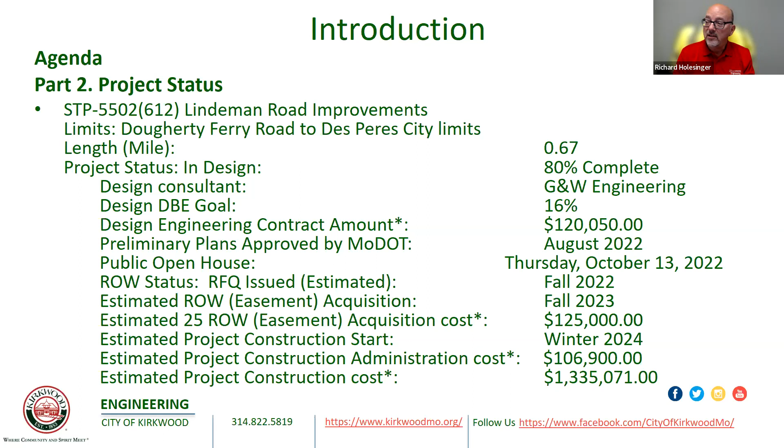Right of way acquisition will be commenced after that, in the fall of this year and probably the fall of next year. I expect about 25 easement acquisitions to be performed. The estimated project construction start time is around the winter of 2024, with completion probably the middle of 2025. There's also the projected construction cost of about $1.3 million.

The asterisks I had on the other page mean those items or elements were eligible to receive 80% of funding. Our funding limit for this project is $1.3 million that has been granted through East-West Gateway and the Missouri Department of Transportation.

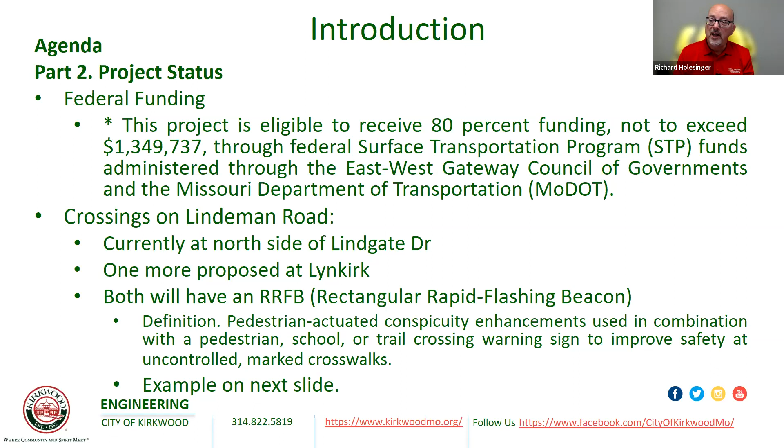Currently, pedestrian crossings that we're looking at on Lindeman Road—there's currently one at the side of Lindgate Drive, and there's one more that was proposed for Lynkirk, but we're still deciding on those two choices. They will both have an RRFB, which is a pedestrian-actuated signal for these uncontrolled mid-block crosswalks. I'll show you an example of it on this slide here. This is kind of what it looks like.

These are generic examples of what they're going to look like. The manufacturer could have a little bit different configuration on them, but that's what an RRFB is or will look like.

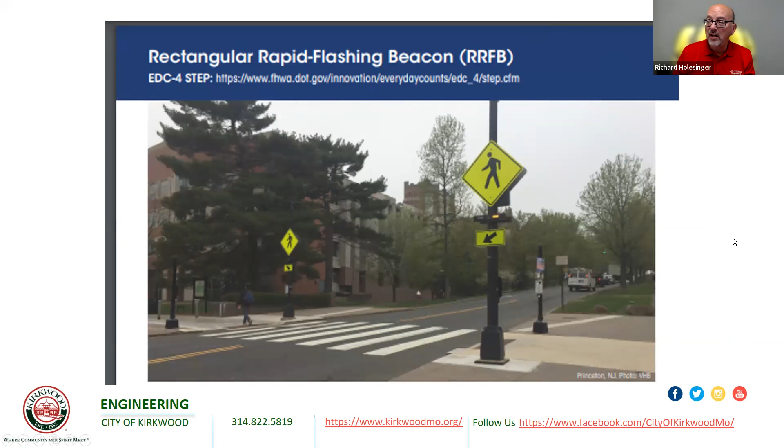Like I said, we'll conclude the virtual meeting by about 7 p.m. tonight. Tomorrow there'll be an open house at the Kirkwood Community Center, room 201, from 4 to 7. Comments—we are allowing about a 30-day period to receive them. We'd like to receive them no later than Friday, November 11th.

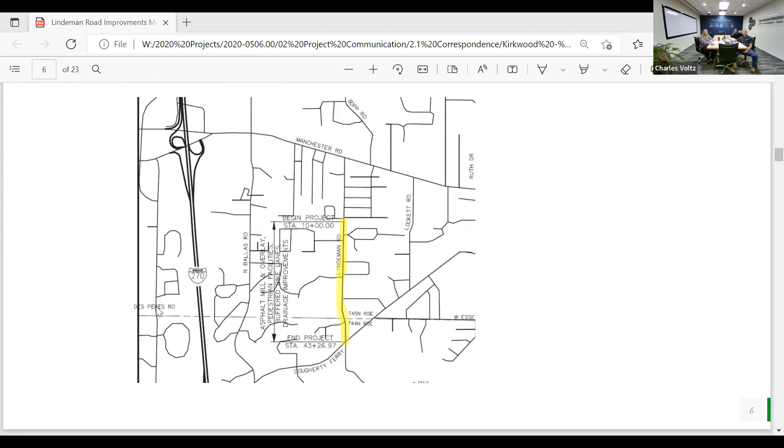So this is just a pictorial view of the project. Again, from the border all the way through to Dougherty Ferry is the length of this project, 0.67 miles. So the existing conditions, as we sit here today, there are 2 travel lanes.

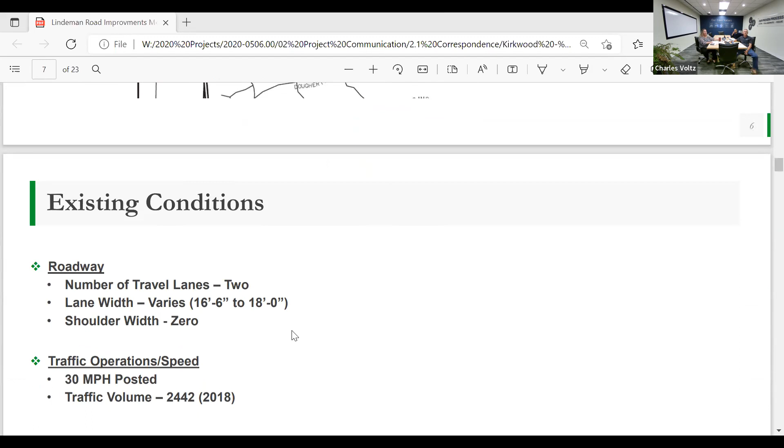The lane width varies between 16 feet 6 inches to 18 feet. There is no shoulder width. 30 miles per hour is the posted speed limit. The traffic volume in 2018 was recorded at 2,442. You'll see that the forecast all the way to 2030-something, you'll see it in another slide, is basically the same. We're not expecting the traffic volume to increase nor decrease over the next 10, 15 years.

Pedestrian bicycle facilities, there's some existing sidewalks on both sides as it sits today. The crosswalks do have a lack of visibility, and as we all know, there's no bike lanes currently within Lindeman Road. It does have some traffic signals and stop signs. From a drainage perspective, both sides have some curb inlets and storm systems and ditches. And as we look at the landscaping, everything is grass and in good shape.

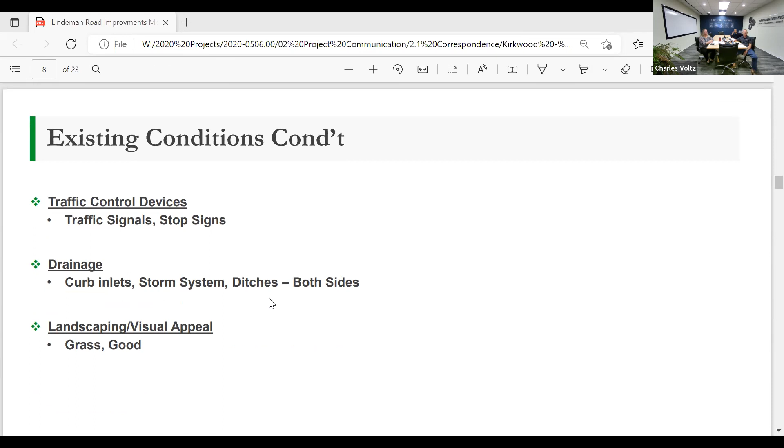So what are we going to do? Well, this is a typical section of where we sit today. I got ahead of myself by a slide. So again, from right of way to right of way is about 60 feet.

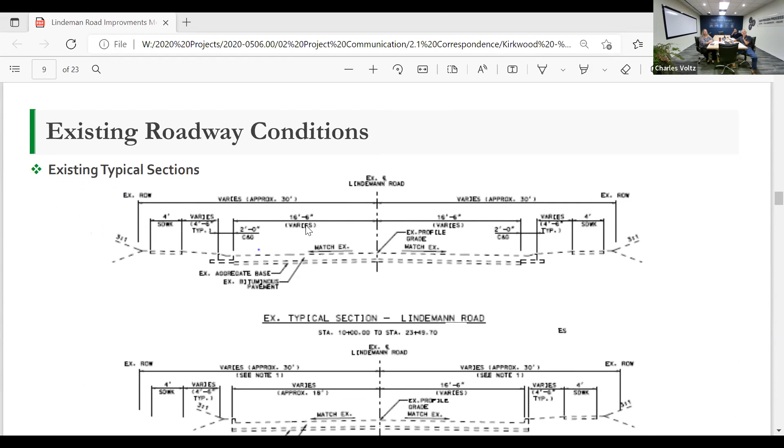So you can see that the lane width is 16 foot 6 and varies. It does have 4-foot sidewalks currently. There's no bike lanes, and that's basically where we sit today. I'll have another section further in this presentation talk about what we're proposing.

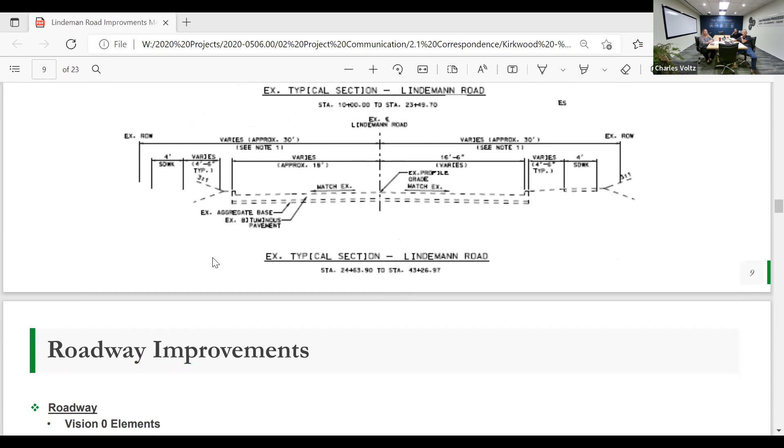As part of these improvements, from a roadway perspective, we're looking at Vision 0 elements. We're still looking at 2 travel lanes. The lane width will be reduced down to 10 feet. There will be no shoulder width will be 0. The design speed will be 35. The speed limit will be 30. Again, I mentioned the traffic volume didn't change from 2015.

We will be providing new traffic signals, new stop signs. We will also be incorporating curb bump outs, and those bump outs are going to enhance and reduce the vehicle speed, reduce the pedestrian crossing distance, and increase pedestrian visibility to drivers. So they'll be incorporated in the design.

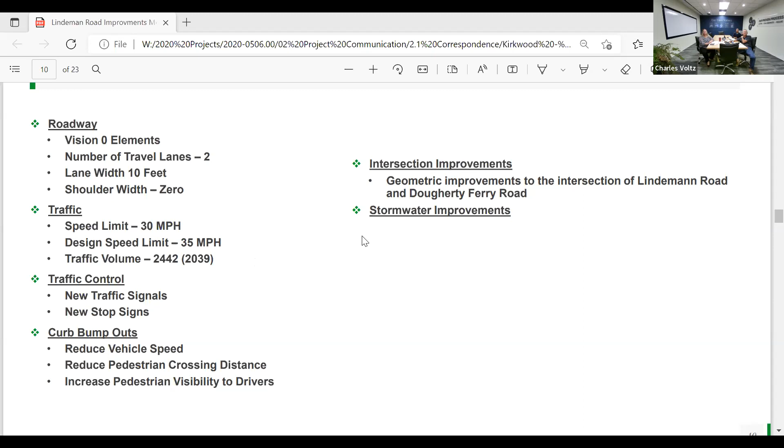And again, I mentioned the intersection improvements. We're going to revisit the intersection of Dougherty Ferry and Lindeman Road. And stormwater improvements will be, again, enhancing and incorporating the necessary runoff protection we currently have there today.

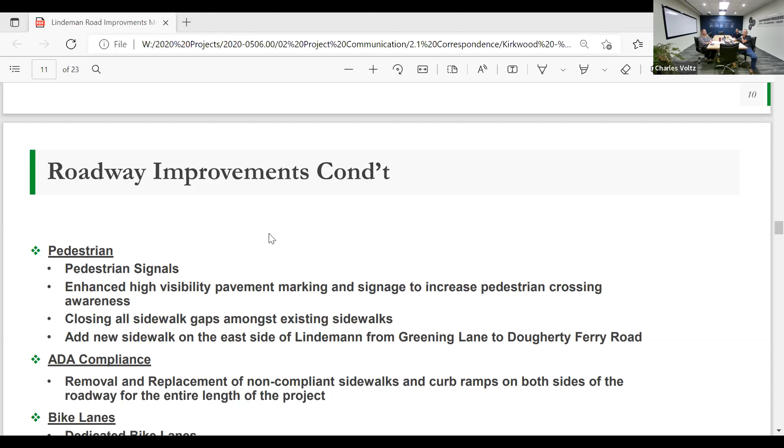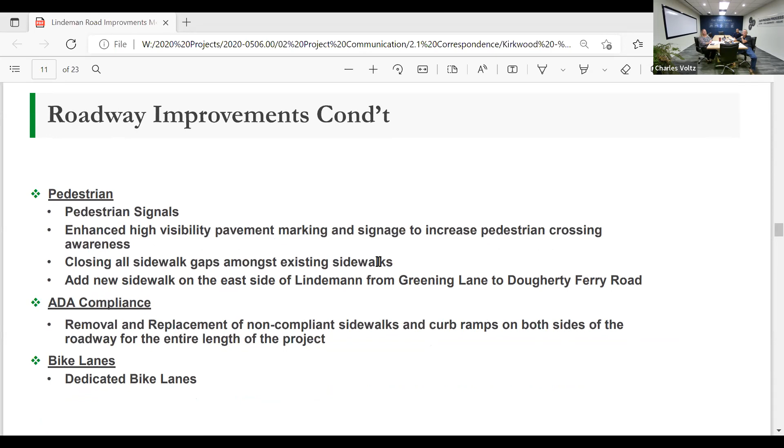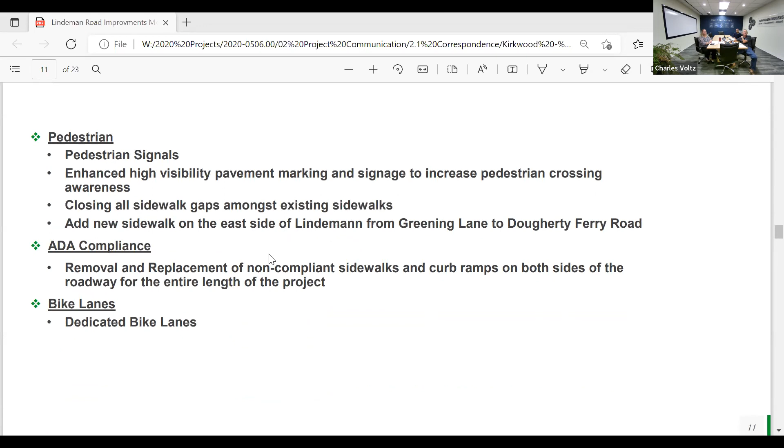On the pedestrian side, Richard mentioned some of the signals, so there'll be pedestrian signals. We're going to enhance the high visibility pavement markings and signage to increase pedestrian crossing awareness. We're going to close all the sidewalk gaps amongst existing sidewalks. We're looking at adding a new sidewalk on the east side of Lindeman from Greening Lane to Dougherty Ferry Road. We're going to be providing ADA compliance design, which includes removal and replacement of non-compliant sidewalks and curb ramps on both sides of the roadway, and put in dedicated bike lanes.

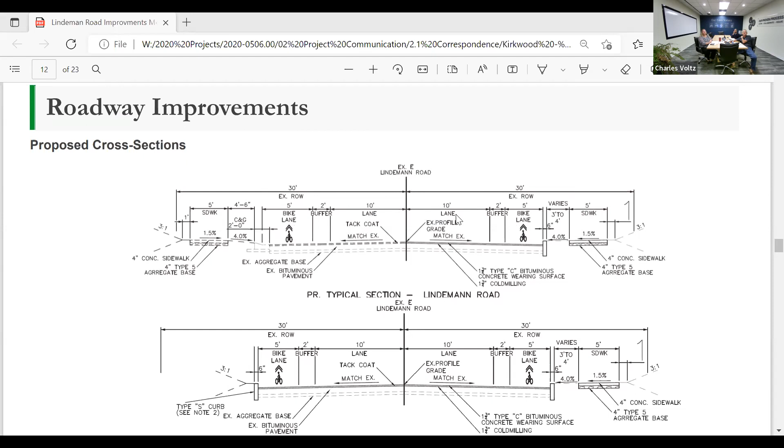So this is how it's going to look going forward. We have the 10-foot lanes, we have a 2-foot buffer on either side, we have the 5-foot bike lane. Then we have green space, and then we have our sidewalk where this is a right of way. Then we have our 5-foot sidewalk. So you can see that the right of way distance is still 60 foot as it stands today. Those are the changes that we're going to be looking at going forward as part of our design.

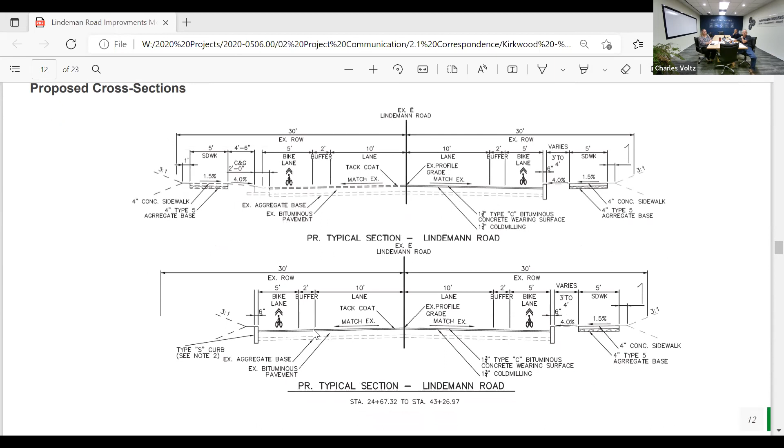So I included a couple of the plan sheets here. We have made up boards on these plan sheets that you're going to see. In fact, these sections here have also been made up as boards. So if you attend the meeting tomorrow or come through as part of the public forum, you'll see these on a 24 by 36 inch board, and you'll be able to see the improvements we're planning on incorporating onto Lindeman Road, and we'll be able to answer any questions you might have further at that time as well.

Again, these boards will be more visible to those in attendance tomorrow. They'll be on 24 by 36, so you'll be able to see a little more detail associated with that.

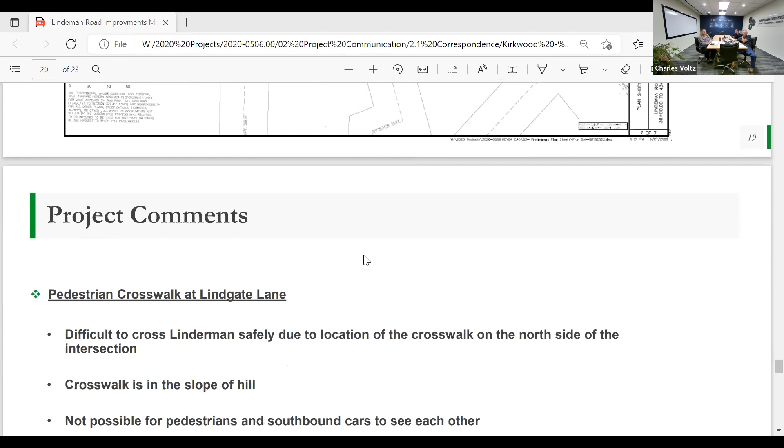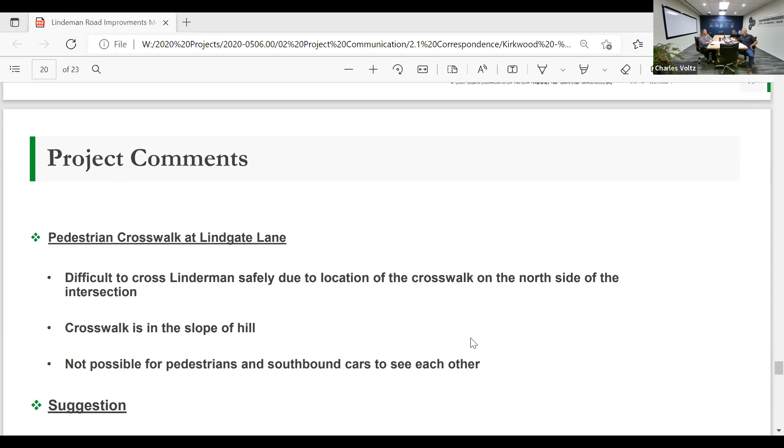So prior to today's virtual meeting, we did get an email from one of the residents, and the resident had this comment: it was difficult to cross Lindeman safely due to the location of the crosswalk on the north side of the intersection at Lindgate. The crosswalk is in the slope of the hill. It's not possible for pedestrians and southbound cars to see each other. And she suggested that the crosswalk be relocated to the south side of the Lindeman intersection, or add a crosswalk warning signal with solar power flashing lights.

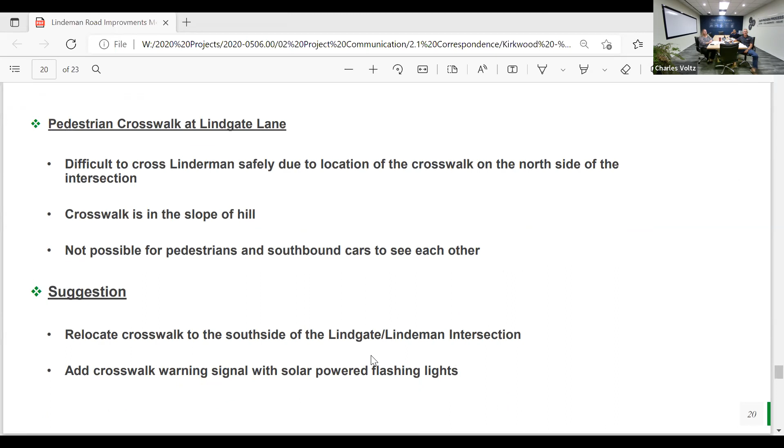Well, she must have seen the presentation before, because that's exactly what we're proposing here. Her second suggestion was adding a crosswalk warning signal with solar power flashing lights.

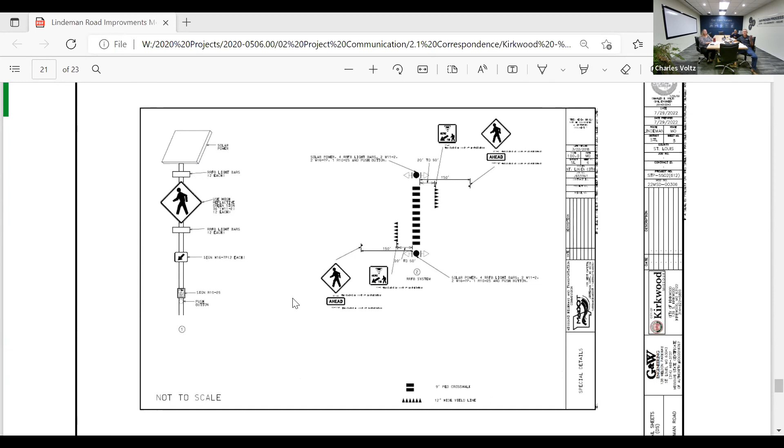Richard had shown that previously, but this is basically the detail that we are incorporating on our drawings at this point in time. It's a MoDOT standard detail, which shows the solar panel, the lights, the sign, and of course the crosswalk here and everything like that. So we appreciate that comment, and we look forward to other comments as well.

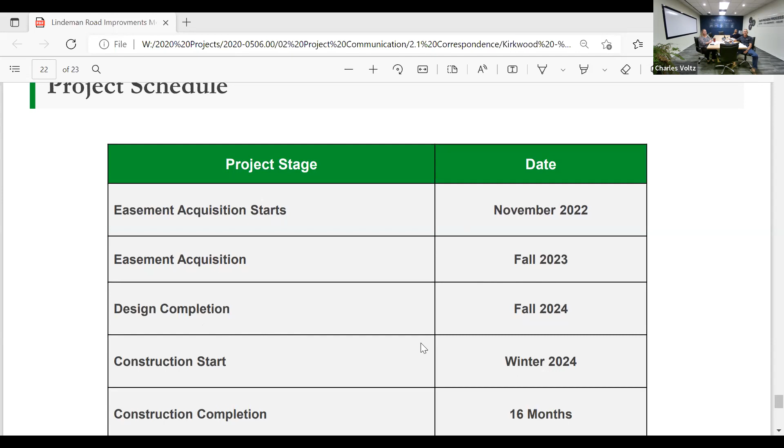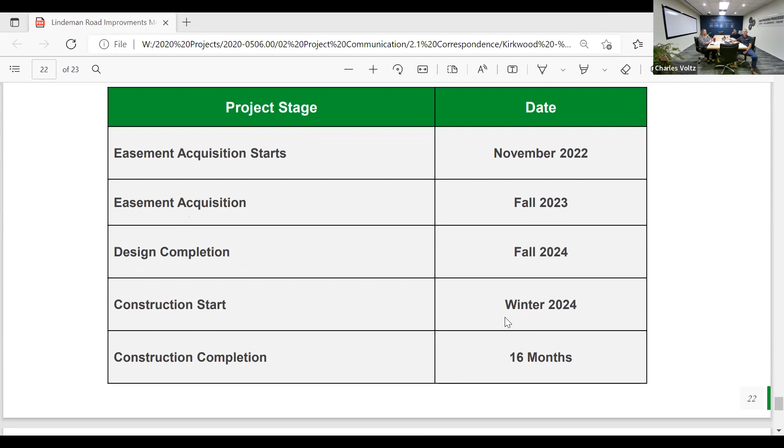So as Richard had mentioned, where we stand right now with the project, we're looking at starting the acquisition of the easements next month. We envision that we'll be complete with the acquisitions of the easements by the fall of '23. At that point in time, we would finalize our design and have that all completed by the fall of 2024. It'll then go out for bids with construction starting winter of 2024, and construction will be completed in 16 months, as we're proposing.

So that's the presentation. At this point in time, we'll open it up to questions.

Okay, I've got one raised hand. Let me give Michael Carmody a chance to talk first. Michael, you there? Yes, I'm here. Can you hear me?

Yes, I can. Great, first of all, great job. It really is an exciting move forward for Kirkwood. Kirkwood's a leader in things such as this. Having said that, I do have a couple of questions.

My first question is about the channelized lane at Dougherty Ferry and Lindeman, which would be on the east side of Lindeman. Is that going to continue to be a channelized right turn lane from Dougherty Ferry? Yes, right there. Yes.

With that, a simple ask - would you consider putting in a raised crosswalk in that channelized lane? We know that channelized lanes are extremely dangerous, and that would make it a much safer crossing in that channelized lane.

I think I understand the question. So basically those coming down Dougherty Ferry, making this turn onto Lindeman, and then your crosswalk is here.

You see that, Charles? Can I step in here? This is Chris with City of Kirkwood. Hi Mike, how's it going? Chris, how you doing? The line work that you see on there is actually a proposed raised crosswalk. Oh man, you're killing it. We're one step ahead of you. I love it, that's great news.

So, second question: further down, where the resident brought up about moving that and putting in the rapid flashing beacon, which you know, Chris, I love that - is there consideration there for a raised crosswalk there as well?

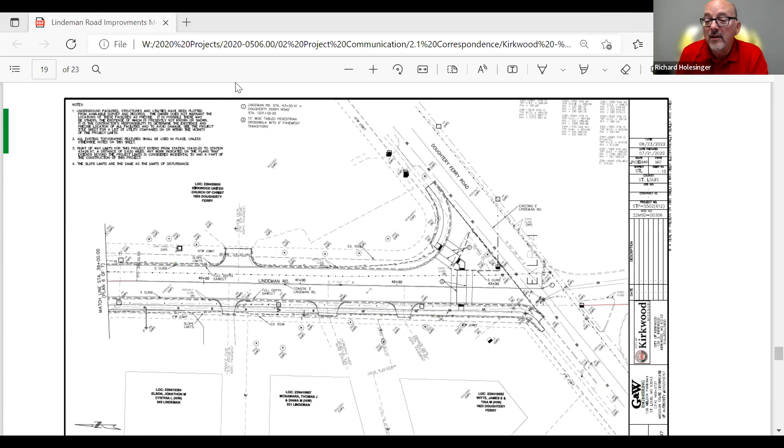So I'm looking at the east side of Lindeman, and I see where the existing road is, that there's a dotted line. Then there's a dotted line with, I guess that's 3 trees, I'm not exactly sure. So the 2 lanes in the middle are the 2 roads, one's the bike lane, and then is it the sidewalk? Because you said you're not taking down any trees, so those 3 trees will stay there, and you're just going to... I'm not exactly sure where things are going with your tiny pictures.

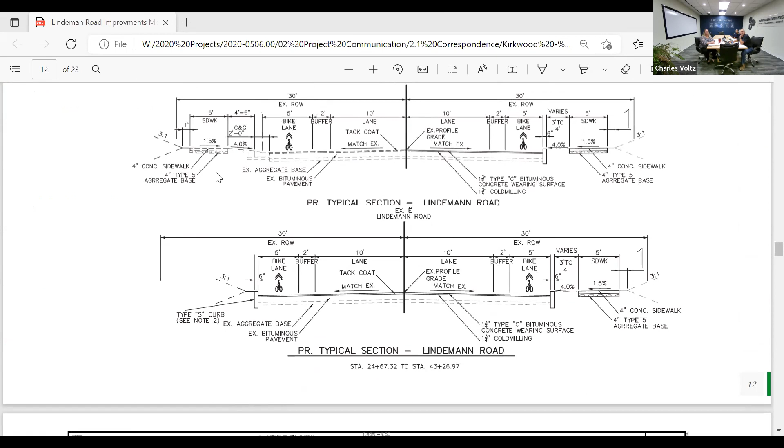Let me take you back to this drawing right here. So as you saw in the previous drawing, we have the 60-foot right of way. So we're staying within that existing right of way with the build out of the traffic lane, buffer, bike lane, space, green space, and then the sidewalk, a 5-foot sidewalk. This is, okay, so 10 feet.

Okay, so if you can go back to the other thing we were looking at, because you said you're not taking down any trees, but if I'm looking at this correctly, aren't those things that are... Those are outside the right of way. Actually, the right of way is closer to the road, and then there's an existing easement line on the outside of those trees. Oh, no, go on the other side of this? Yeah, the east side, this one.

Okay, so those trees are outside of the right of way. The right of way is the dash line between the trees and the road, and the dash line on the other side of the trees is an easement line. So this line is the easement line, the existing right of way is this arrow that points down to this dash line here.

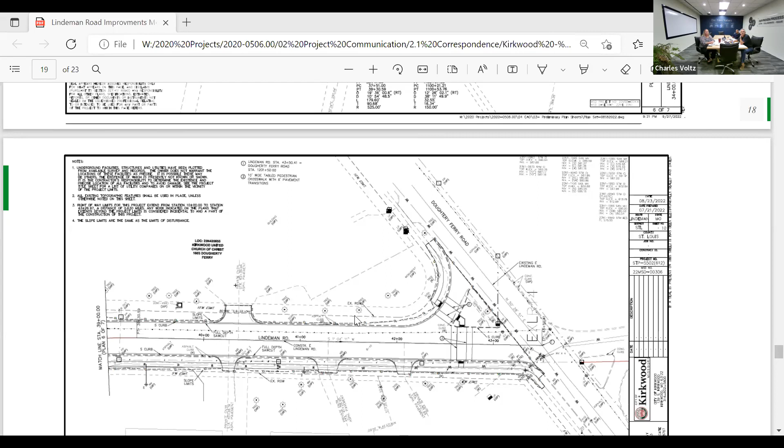And that's where the sidewalk will start? That will be the edge of the construction site, so these trees will stay. Okay, but when the construction is finished, the dotted line will be where the sidewalk is? There would be no sidewalk there. Oh, you're not putting a sidewalk on that part of Lindeman? Correct. Oh, okay, so where does the sidewalk stop?

At the intersection, it stops at the intersection. So if you go along Dougherty Ferry and you're going along that curve down and then across the street, you would make a crossing across Lindeman. And then if we go up a couple pages, that's when you could see where that sidewalk picks up. Okay, so you're not putting a sidewalk then between Lindkirk and Dougherty Ferry on the east side of Lindeman? Correct. Okay, thank you, that answers my question.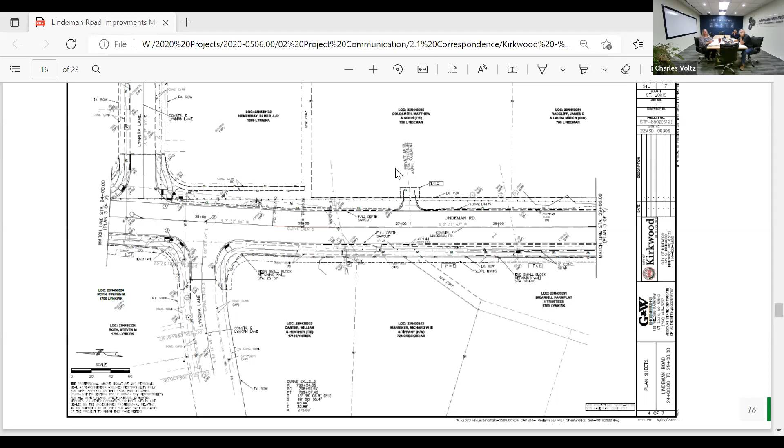Is a 60-foot right of way the width that is currently curb to curb, or are you acquiring an additional strip of land? I think we already answered that. That was from Laura Radcliff. Yes, I just couldn't see it, I wanted to make sure we weren't missing a question. Good catch.

Michael, do you still have any questions? I still see your hand up. Rick, I see a hand up from Patricia Parker. Has she already spoken? I'll ask again, Rich, I'm fine, Michael is fine. Thank you guys, I'm just gonna move along now, but thank you all for a great job. Most importantly, for the extra time and effort you guys are putting in tonight. I know it's not unusual, but I appreciate the service. Bye-bye, thank you Michael.

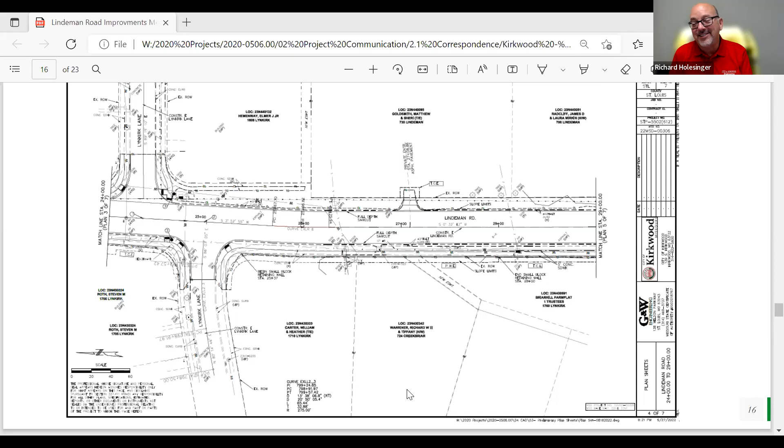I'm sorry, give me a chance here. Hello, it's Patricia, sorry. You're still out there, aren't you? I am. Okay, since nobody is jumping in to ask anything else, what are the plans for my part of

Lindeman? If it's federal money, somebody has to go after it. My part of Lindeman is the most dangerous part. We have no sidewalks whatsoever from Ballas Road to Dougherty Ferry. What are you planning to do with that? So your part of Lindeman is not a functionally classified street, so we cannot get federal dollars for that portion of Lindeman. Excuse me, it's not a functionally classified street?

Correct. So East-West Gateway determines what roads are eligible for federal funding. Local streets are not eligible for funding through federal dollars. And I'm not saying it's eligible for city local funds either. If you would like sidewalks, there's a petition that would need to be filled out because that involves other neighbors on your street. A petition would need to be filled out for the city to consider sidewalks on your portion of Lindeman. There are very few houses on my portion of Lindeman that face the road.

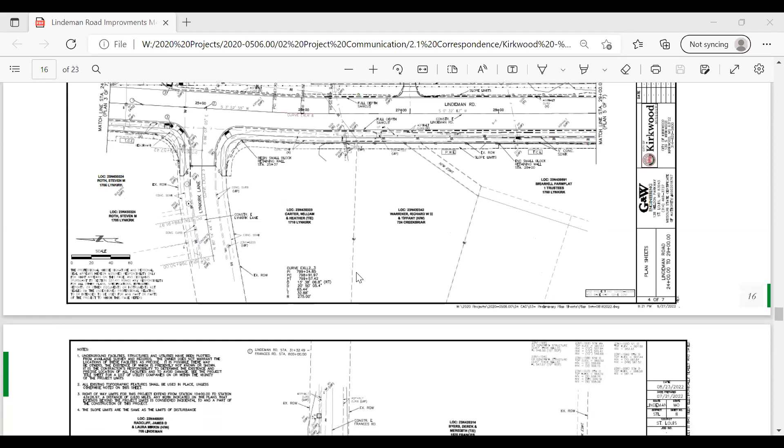There's maybe 1, 2, 3, up to 6 houses that face the road at all. So yeah, we would need a petition from the majority of those 6 houses to add a sidewalk. Because a lot of people have differing opinions of a sidewalk in front of their house. I get that, but I also have the opinion that when you're walking on that narrow street, really 2 cars, when you park a car out on Lindeman, people can't pass, it has to be one at a time. You cannot get 2 cars through there.

Understand, I'm passionate about this because I walk every day. Somebody's gonna get killed and it might be me. There was an old man who damn near clipped me the other day, he was so close. It's dangerous, I'm just passing that along. I appreciate that, and it's wonderful what you're doing to the other part, but where I live it's exceedingly dangerous. And I've had my say.

Thank you very much. What I'll respond to that, Patricia, is we've got a sidewalk project going on right now on a different street in Kirkwood. They don't have any sidewalks on that street right now, and there are definitely opposing views on putting a sidewalk in. A lot of people are comfortable using the street. It does have different characteristics as far as grades go than Lindeman, but there are opposing views to having sidewalks, and the way the city handles that is by receiving a petition from the majority of the residents to get a sidewalk.